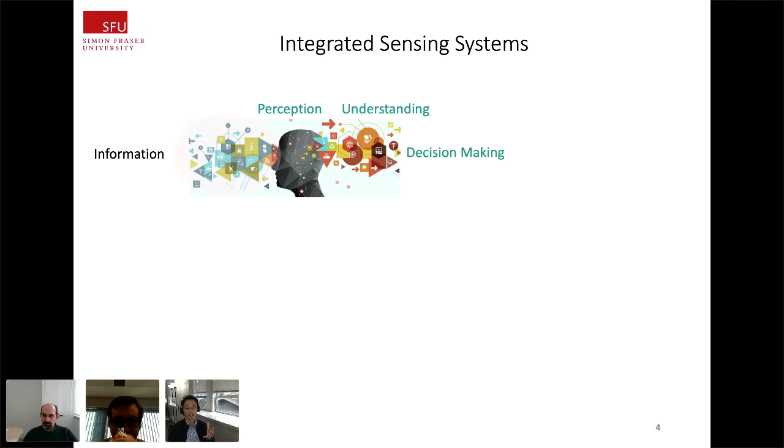When you think about the Internet of Things and the connected world concept, the important feature, the important device, is the sensor. By replacing our sensors like eye, nose, tongue, can you get those with devices? Internet of Things and wearables - sensors can perceive this information well. But as you know, sensors historically were rigid.

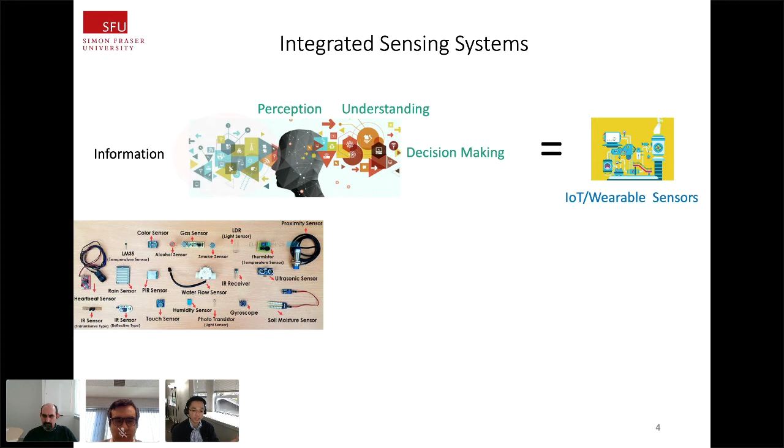All different forms of sensors have a mismatch, possibly a mechanical mismatch, between what's worn on our human body and the sensors themselves. So there's a huge need for curvilinear form factor devices, meaning flexible, stretchable, or three-dimensionally integrated - what we call structurally integrated sensors and interconnections. There were several recent demonstrations of wearable sensors: wrist type, printed directly on the skin, or structurally integrated on the tip of a robot. In order to realize these curvilinear form factor devices, we definitely need a flexible manufacturing methodology - that's why we focus on 3D printing, as we need fabrication methodology for 3D unique form factors.

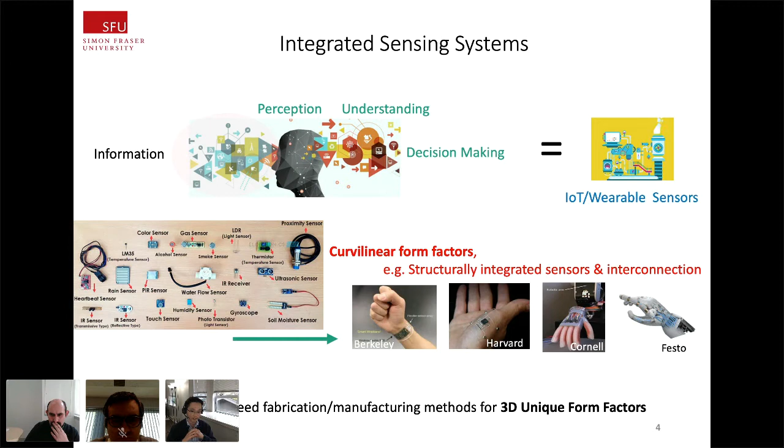We're developing 3D printable novel materials, especially conductive materials. Without printed conductive materials, we cannot realize any sensors or any electronics, right? So that's one of the important parts.

And then we are interested in developing new technologies in terms of 3D printing process, something like a core-shell nozzle-based 3D printing or six-axis robot-based 3D printing, stuff like that. Also important is topology optimization and thermal or electrical simulation for your 3D printed objects. So these are kind of fundamental.

When I started my lab, we were very interested in making physical sensors, chemical sensors, stuff like that. But recently we realized that one important feature of this field is getting those individual devices, individual components connected. So I'm more interested in interconnections than sensors themselves nowadays.

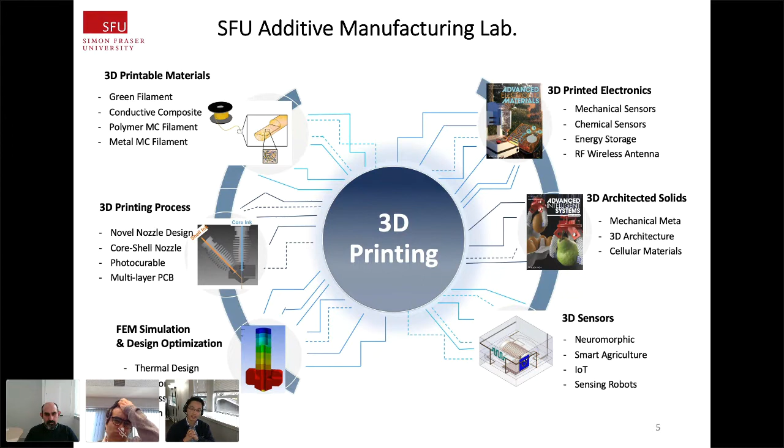All right, so moving on, let's think about 3D printable structural electronics. So I discussed that 3D electronics, which is structurally embedded. There's been a lot of research done about this field in terms of device fabrication, like miniaturized capacitor, inductor, stuff like that.

And then by having the architected solid, energy storage device research has splendidly increased nowadays, and also wireless transmitting devices in terms of data communication, 3D printed, and all those sensors and robotic applications with the sensors too.

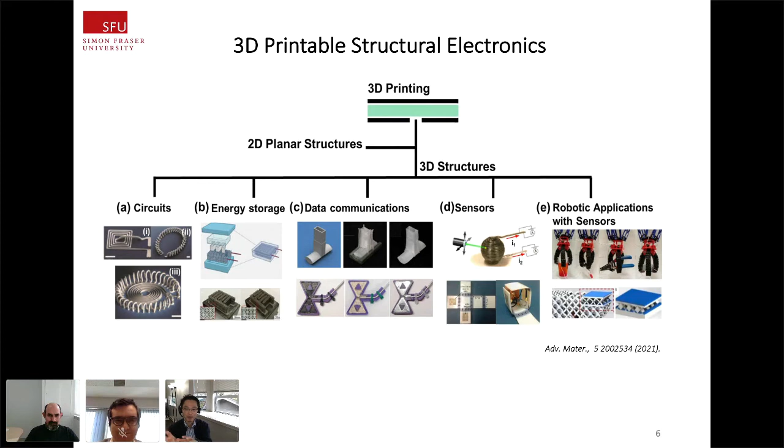So my talk today is specifically focused on biomedical wearables and sensing robot applications developed in my lab. I'm not going to go over all those. So maybe the talk is more on the biomedical sectors today.

Okay, so before introducing our outcomes in terms of wearables, I want to talk about the number one important thing in my lab, which is actually the interface with biomedical wearables or sensing robots. That's the conductor, right? So 3D printed conductor. Without careful consideration of this conductor, it's not going to be useful for wearables.

Because it's going to contact directly with our skin, or it's going to be fabricated on the robot hand, and then it's going to contact with the human body. So without careful consideration of the conductor, we cannot realize a reliable as well as safe device. So we have been working with main conductors like metal nanostructures, such as silver nanoparticles, silver nanowires, and also graphene.

The reason we chose those is because there are a bunch of different conductors in the market, but the important thing is conductivity. If it is not reaching over 10 to the 4 Siemens per centimeter - Siemens per centimeter, not Siemens per meter - if it's not reliable above this level of conductivity, it's not going to be useful. I mean, we can get a resistive sensor with, let's say, 10 Siemens per centimeter level carbon nanotube or something too, right?

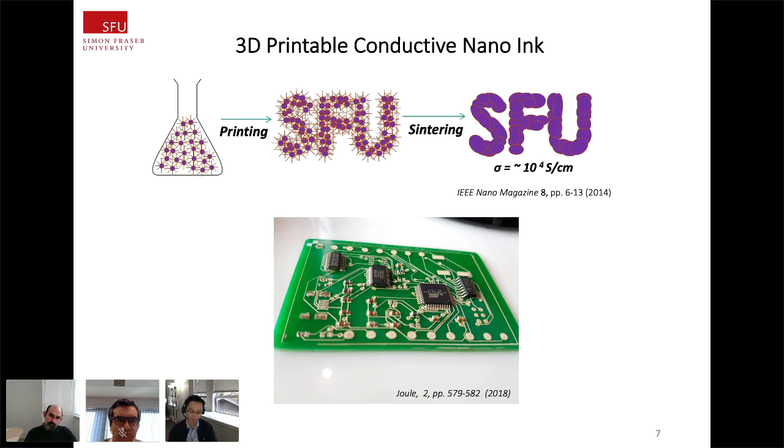When the top electrode can vibrate very sensitively, it can catch any type of acceleration. We can design that top electrode as a membrane type or serpentine type, then we can make a very sensitive accelerometer that can detect any kind of motion. Even when attached to our body, it can detect heartbeats. If you see this graph, we attached this accelerometer on our neck, on the pulsing zone, or inside the elbow, also a pulsing zone, and we get very reliable heartbeat sensing, similar to PPG. I think you're familiar with the oximeter-based PPG—this is identical signal of heartbeats.

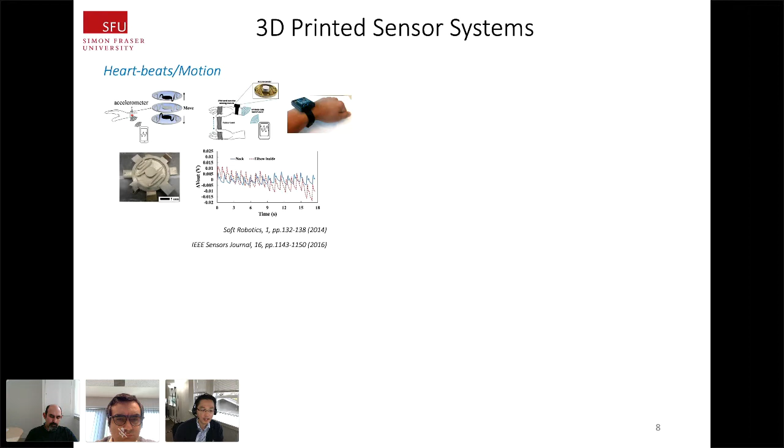We are also interested in blood pressure measurement. There's some methodology to estimate blood pressure by having ECG and heartbeats together. I didn't post the processing here, but we have an accelerometer on our pulsing zone on the wrist, and an ECG sensor attached close to our heart—so we have paired sensors together.

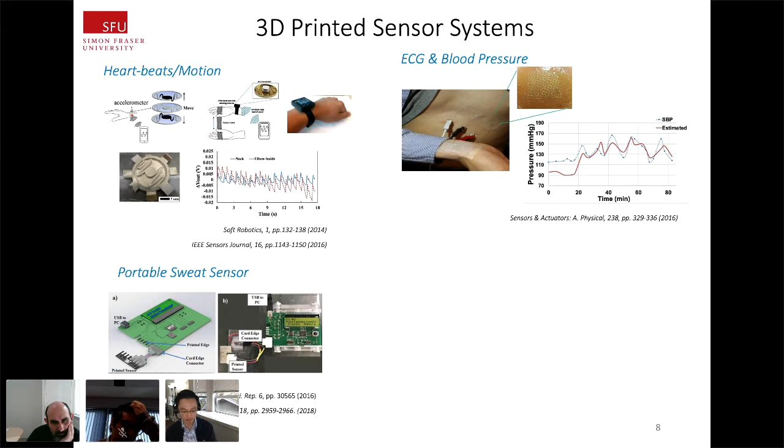So this is kind of a sensing platform. We developed the portable digital microfluidic, which can vertically move, and then we can get droplet sensing and droplet mixing, stuff like that.

So like you can see in this vertical tower, the droplet is moving from the bottom to the top. This is electrically moving the droplet against gravity. So by having this platform, we can select some heavy ions and lighter ions, and we can detect the targeted ion. So we utilize this digital microfluidic sensor.

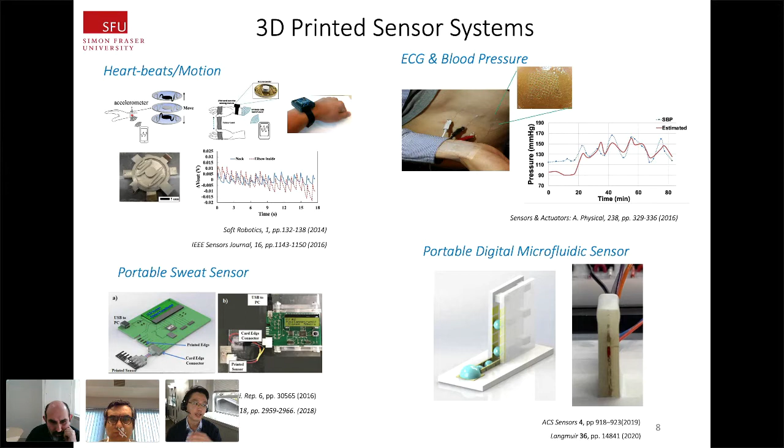So these are the 3D printed wearables and the portable sensor system we developed so far. Especially about ion selective chemical sensing and neuromorphic, we're interested in sensing our saliva. So we want to make kind of an artificial saliva sensor like our tongue. That was our objective.

So we made a different platform of study. This is a kind of well-known field we call the ion selective membrane-based thin film transistor system. As you can see, yellow is the electrode, so source, drain, and gate, and we extend the gate.

And that gate is modified with an ion selective membrane, and when the ions are selectively transmitted, the gate electrode resistance can be changed. By having this mechanism, we can get the transistor signal. So when this ion selective membrane is targeted with ammonium ion, then we can get a very linear relation.

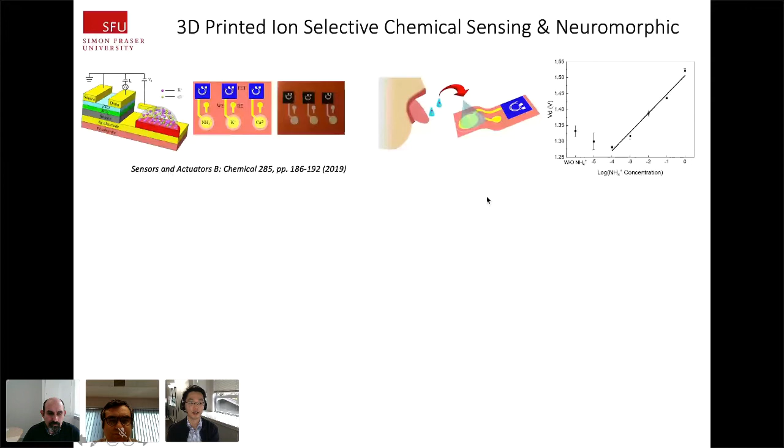So back then, we were interested more in the sensor itself. But again, as I mentioned, we are interested in making a sensory system. That's why one of my PhD students is focusing on neuromorphic.

As you can see, neuromorphic is a kind of sensing system like in our body. We want to see not just the sensing, but the processing of that signal. So we're kind of mimicking our neuron.

So the stimuli comes into the sensor. This is the same thing like this ion selective membrane. And then that signal can be activated by an electrical oscillator. So we designed the 3D printed electrical oscillator, which contains all the components inside, like resistor, capacitor and inductor, and then a resistor outside. So we designed the oscillator.

Then the oscillator can give an AC signal to the synaptic transistor. Then we can get potentiation-like behavior. And then eventually this synaptic transistor has a mechanism to have a memory effect.

With a smaller quantity of ions, we can detect some signals by training. That's the beauty of a neuromorphic system. So we developed this system to realize, from sensor activation, eventually a memory effect too, as a neuromorphic system. So this kind of approach is moving forward for chemical sensing.

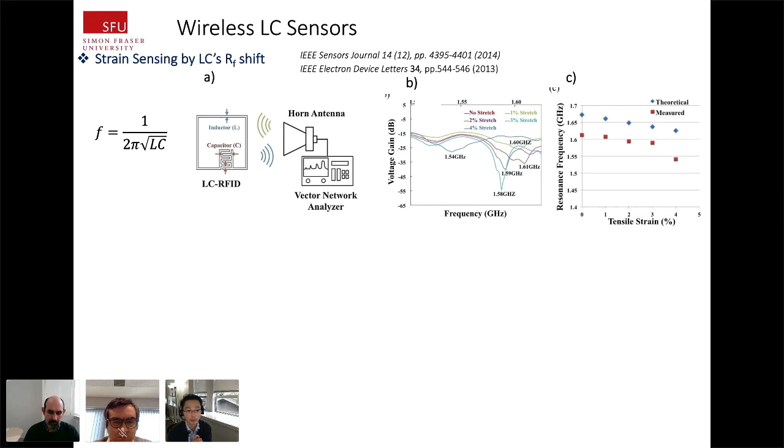So by having tensile strain, we can detect the resonant frequency change like that. That was the mechanism we developed. So LC's resonant frequency itself can be shifted. Then by reversing it, we can get how much strain is applied to the human body. So that was the strain sensing mechanism.

And another mechanism we developed involves these resonant frequency peaks' quality factor change.

These resonant frequency and quality factor can significantly rely on the resistance of the circuit. For example, we have a loop of this LC connected with an ion selective membrane. If we have a targeted ion passing through this ion selective membrane, then the resistance of the whole loop of this circuit can be reduced. When we have a reduced resistance, we can get the quality factor, or the peak, increased. So by detecting specific ions in your saliva, the resonant frequency quality factor can be increased.

That was the methodology we developed. So these two mechanisms are the main things: one is resonant frequency shift, the other is quality factor change. We were using these a lot for sensing applications.

That was published last year with wireless chemical sensing. That was kind of the first to try this without any expensive silicon chips or something like that.

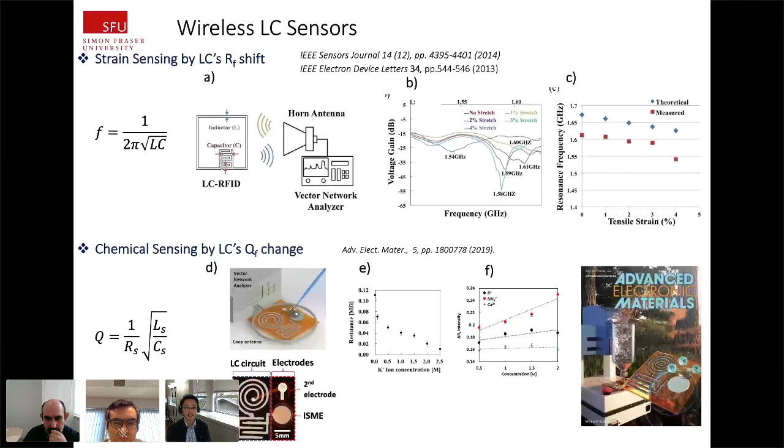So let's change our gear toward sensing robots. I like these schematics a lot—interaction between robot and human. As you can guess, our era will be moving on to AI or robots, those kinds of things. Some part of our population, like seniors or some children, it's not easy to educate them to wear wearables.

That was the initial motivation for me to move my research from wearables to sensing robots. So instead of having wearables on our body, why not have periodic interaction with a robot and the human, and give our biomedical signals to the robot?

I cannot say this sensing robot can replace the technology of wearables, because there are sectors of wearables which allow continuous or ambulatory monitoring. In that sense, a robot cannot be in touch with you for a long time. So it's not going to be replacing, but it's a somewhat complementary approach of sensing robot for some part of the wearables. That's the niche field we want to focus on.

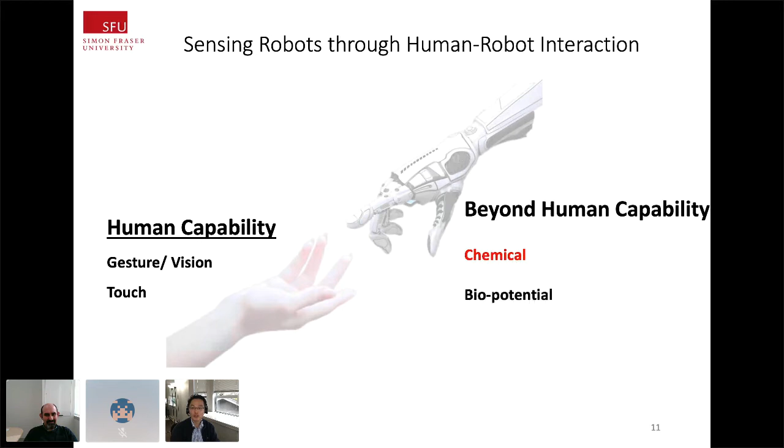When you think about human hands' capability, we can do gestures, vision, or touch, but chemical sensing is not available with your hands—you need to use your nose or tongue. But with a robot, if you have chemical sensors on the tip of the robot hands, you can do chemical sensing.

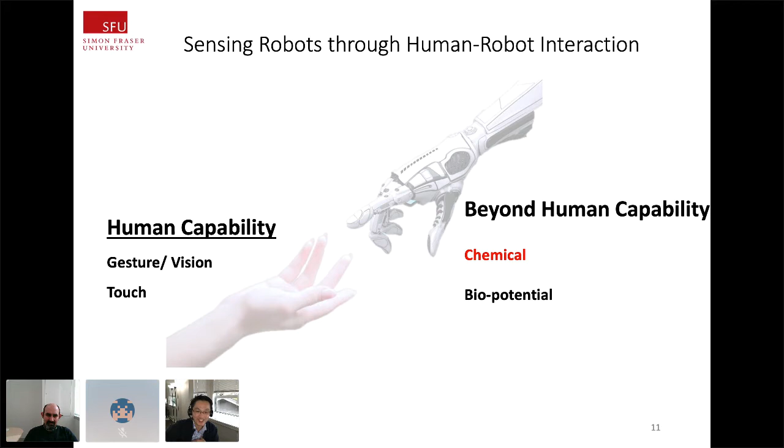You can also have biopotential sensing, something like ECG, EEG, or EMG. You cannot measure the electrical signal of your heart with your hands, but the robot can do that. That's our concept of the sensing robot.

This is a fresh paper we published recently regarding this sensing robot—a 3D printed sensing robot. Why do we need 3D printing? Because you cannot replace your robot every month or on a weekly basis. Once you have your robot, it can go with you for a long time, like a few years. But robot hands can be replaced whenever they're contaminated or whenever the function isn't working properly. 3D printing is the key technology we can apply because customization of functions and devices is a good fit with 3D design and 3D printing.

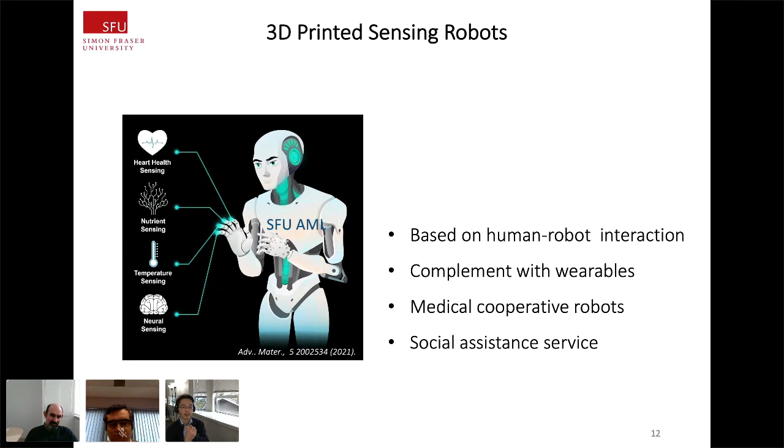This concept is based on human-robot interaction. Once again, it's a complementary technology with wearables, and medical cooperative robots can be available, and social assistance service is possible with the robot. Robot is not just hardware—by having AI or machine learning inside, it can have very smart and intelligent features instead of just sensory things. So there are a lot of features there; combining AI and this sensing capability, we can do a lot of interesting things.

Moving on to sensor capability in the sensing robot, we're very much interested in the robot body itself first. We've done a lot of 3D architected solid research in my lab. Starting from around 2016-17, we initially started with the rigid format of periodic structure—a well-known rigid structure which can be the main body of the sensing robot. This is a rigid octet structure.

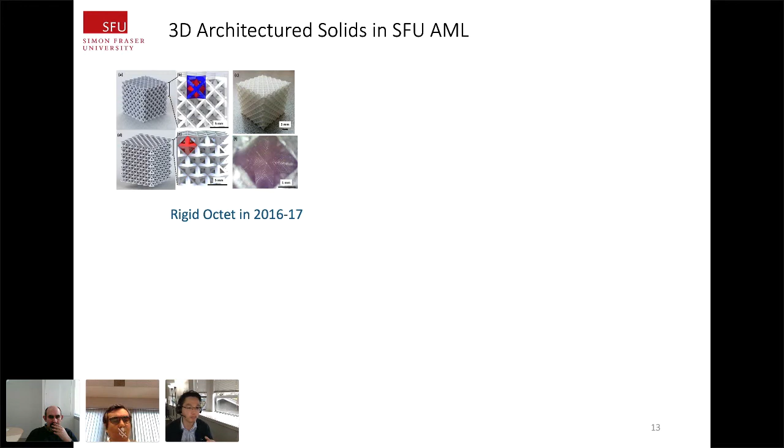We are interested in 3D printing of different materials for realizing mechanical tunability. Rigid octet and double gyroid structures were studied too, because these are very good for increasing surface area for energy systems for robots, etc.

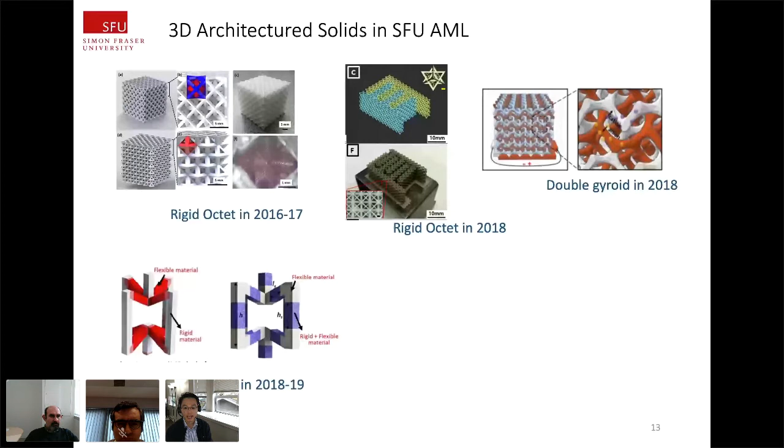We are also interested in mechanical metamaterials, which show different mechanical properties than conventional mechanical structures, like auxetics, which shows a negative Poisson ratio. I won't go into details here, but if you're interested, follow our papers on my website. Recently we've been interested in mechanical metamaterials like origami, which has some durability when bent or compressed.

An interesting thing about origami is that if we embed capacitors inside, when it is squeezed and compressed, this capacitor gap can be shortened or reduced, so capacitance detection becomes easy. This kind of origami sensor was used.

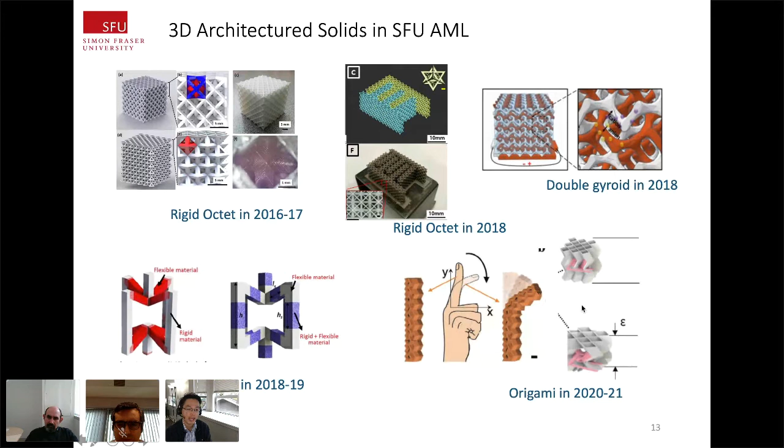Nowadays we are interested in sensing features with this kind of origami structure, and more on the robot body with these rigid structures. So the first robot we want to demonstrate is what we call the cooperative sensing robot with a touch sensing feature.

As discussed previously, the robot body is composed of a periodic octet structure, and we embed a capacitive sensor at the tip of the robot finger, designing dielectrics inside these gaps to increase sensitivity. The joint is also important — it can be bent like that, so we need a durable feature inside this joint using the auxetic structure we embedded there. That can be applied to a robotic gripper like this.

The sensing feature works like this: this white block is a kind of insulator. When the insulator is touched, we've programmed it so the finger doesn't move. But when touched with a conductor like a human body, the capacitance change is higher, so the robot finger moves or bends. So we have a smart feature here.

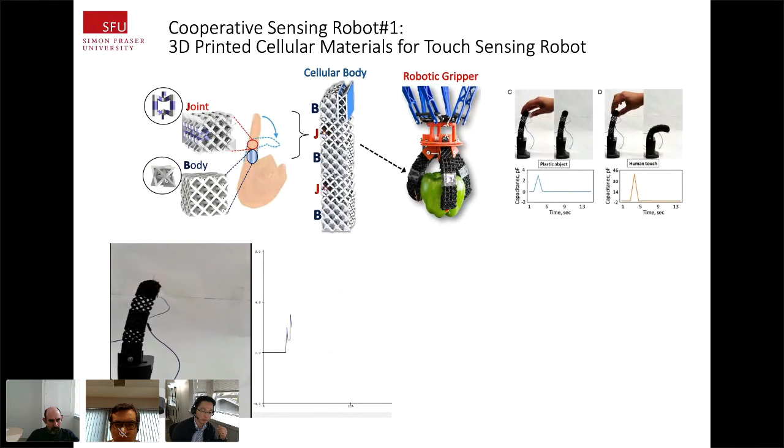You can see here: touch with the insulator, capacitance change is small, so the finger doesn't move or bend. But when touched by a human, capacitance change is high, so it bends like that. This capacitive pressure sensor can also detect whether the object is big or small, so we can apply different programmed forces to grab something — like this, gripping like that.

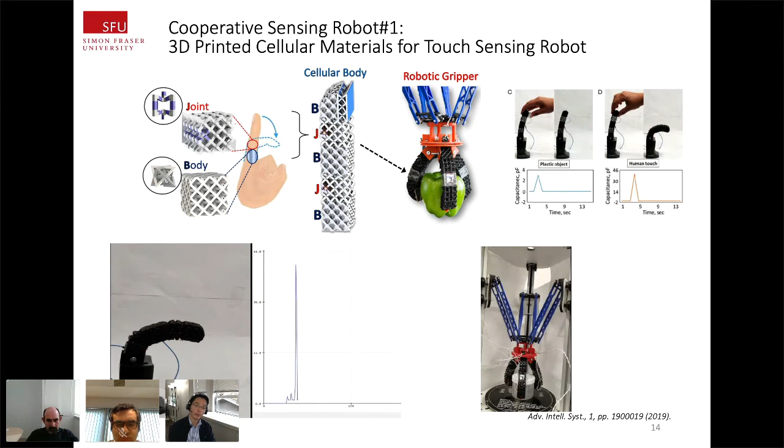So that was our first robot, which is a pressure-detectable, touch-detectable sensing robot.

The second sensing robot we're interested in is about chemical sensing, as I mentioned. When we designed the fingertip, the left side shows the finger design and the right side is the actual sample. The top front of the finger is an ion-selective membrane based chemical sensor, and the back side, like our nail side, has an LC circuit which can deliver signal wirelessly.

We have an interconnection from the front to the back side through conductive 3D printing inside. So this is a quite well-organized device.

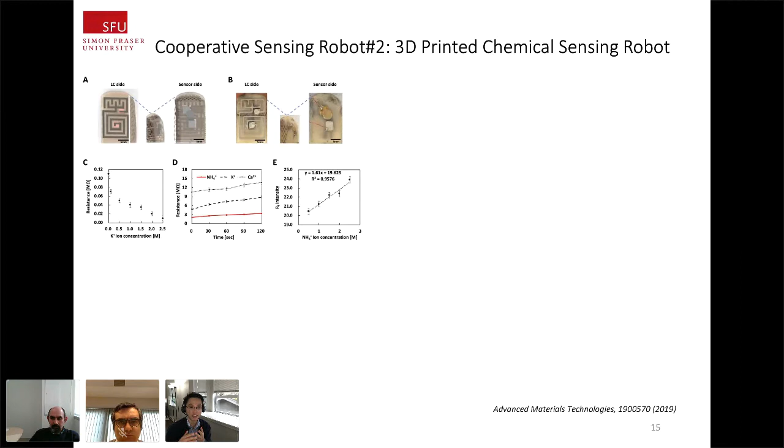When ions are detected on the ion-selective membrane, the resistance of this closed loop circuit changes. This resistance change gives you the idea of how to program the motion of the finger.

We designed this kind of robot hand, so when the resistance changes in a wired situation, it can move the finger. Visually, people can see how much concentration of ions are present.

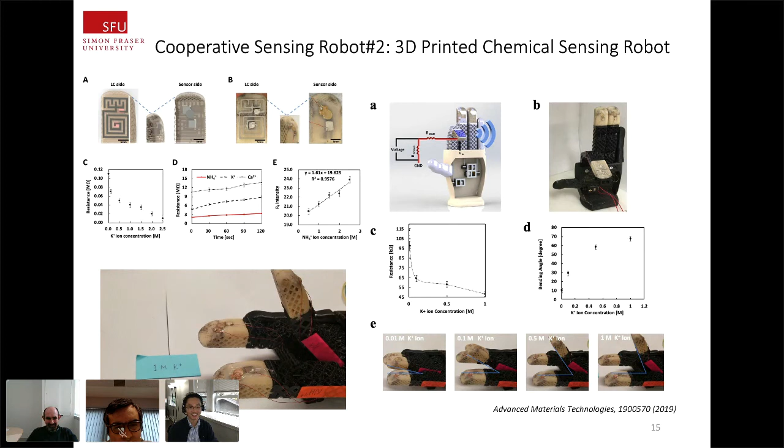For example, at 0.01 mole, potassium ion movement is a bit small, but by increasing that concentration, the finger motion becomes significant. Seniors or someone who cannot move can visually see the robot's finger motion to gauge the concentration — this video shows 0.01 mole, a very small movement, but by increasing the concentration it moves more. At 0.5 mole it moves much more, and eventually at 1 mole, it stands up like that. That gives you the idea of how chemical sensing happens.

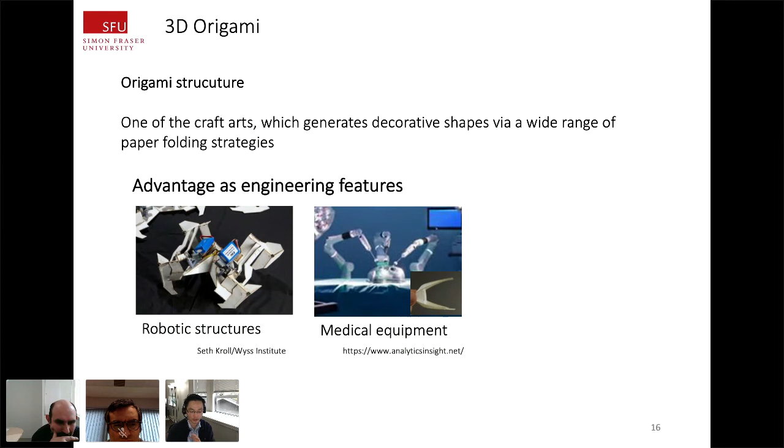Moving on to 3D origami, one of the architected solids we introduced. There are a bunch of different origami research directions, but we're interested in one specific 3D origami which shows quite compressive features. So the third cooperative sensing robot, for biomedical sensing signals, uses an origami we call the Miura-Ori module.

The Miura-Ori module is well known, but we tuned the design to make it durable, so your finger doesn't need to bend to the other side.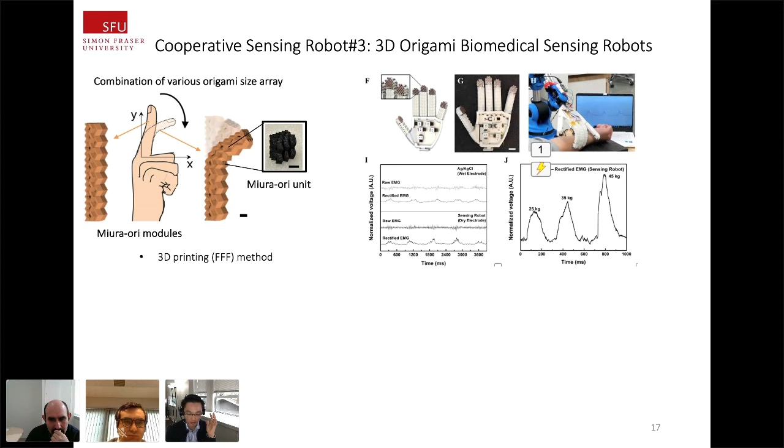We have this hand design, and at the tip of this robot hand we have electrodes. Those electrodes, mainly 3 electrodes, are needed for EMG or ECG measurement. So this is the demonstration of that hand, and the electrical signal of our muscles can be detected with these robot hands, something like that.

So now this is a preliminary demonstration with a 6-axis robot and our sensing robot hand, but it can be implemented into a humanoid robot eventually to measure this kind of electrical signal.

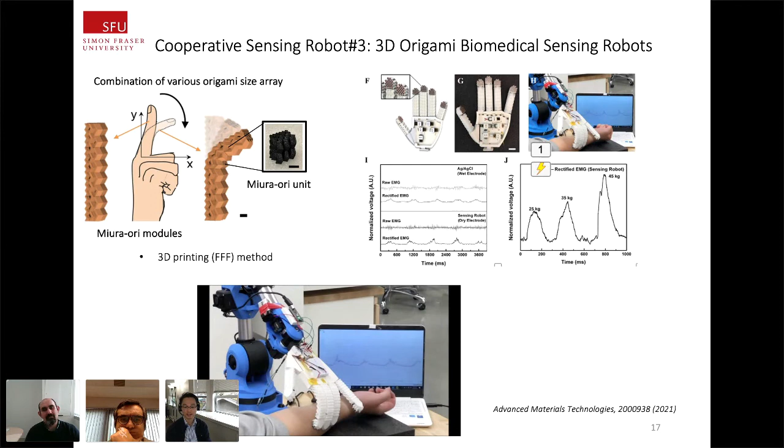And this origami is very interesting in terms of sensing once again. It has some durability, and the electrical capacitance measurement is quite sensitive by having pressure on top, like a smart insole. This capacitor gap can be reduced significantly, and then we can get a capacitance signal on the whole, the entire foot.

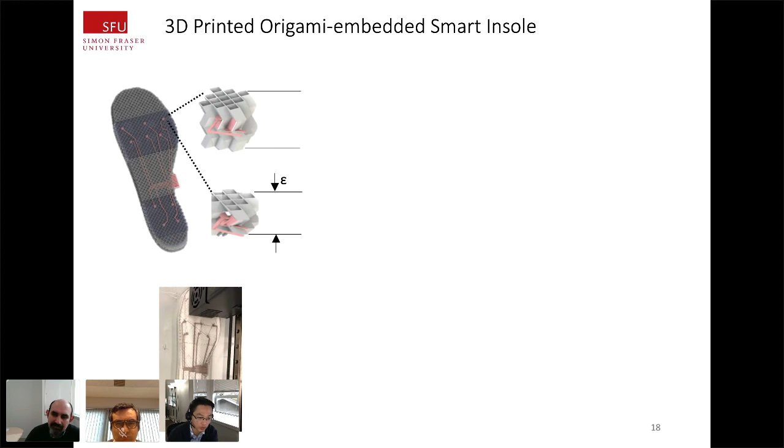Eventually this is a 3D printing process. The electrode is embedded inside the insole and made like that. The capacitance change is quite linear, so we can get a reliable capacitance signal, and then get the mapping of it.

So when there's some issue with our foot, like plantar fasciitis, the pressure is usually applied on the back side of the foot. But when the posture is corrected and the plantar fasciitis is changed, we have more reliable pressure application through the foot, like this.

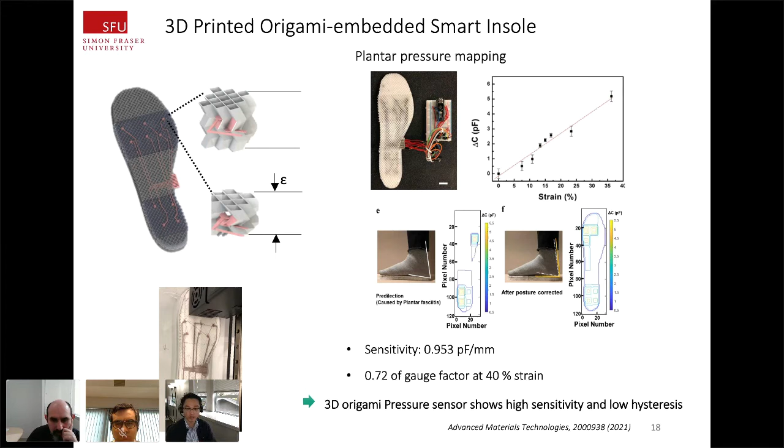So we can detect whether the patient or participant has plantar fasciitis or not by having this kind of mapping. This is done by a 3D printed origami inside, so origami itself is the structural unit inside the smart insole as well as the sensing component. That's the beauty of the 3D printed sensors inside this.

During COVID last year, you probably heard about engineers contributing by joining forces with medical doctors, etc. I did my best during the lockdown of my lab too.

So we thought about the significance of the COVID-19 pandemic situation. As you know, there were a lot of patients initially, not now. We realize nowadays not many patients need an actual ventilator, but back then, around May 2020 or summer last year, we thought a lot about generating cost-efficient ventilators. So our thought was like this.

One important cheap version of a mechanical ventilator is this AmbuBag, an automated AmbuBag. But when you think about it, the AmbuBag can be replaced a lot because of continuous stress and strain generation. Can we generate this kind of strain periodically instead of having a shock like that? That's our own idea, so by replacing this conventional AmbuBag, we want to make an origami bag.

So this is the eventual prototype we generated. Basically this origami doesn't need to be big like this because the volume can be hugely changed. Compression and release, 85% is changed, and the strain generation is periodic like that, essentially because it's based on individual joints.

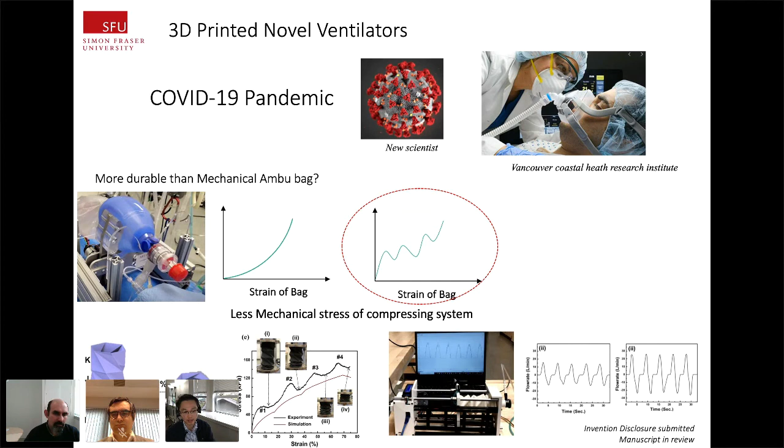Compared with this AmbuBag, it's going to be much more mechanically durable, and we can tune the air volume depending on customization possible for patients. So reliable air delivery of about 300 milliliters or about 600 milliliters is possible. And this is the video for you to understand about this origami bag based mechanical ventilator we developed.

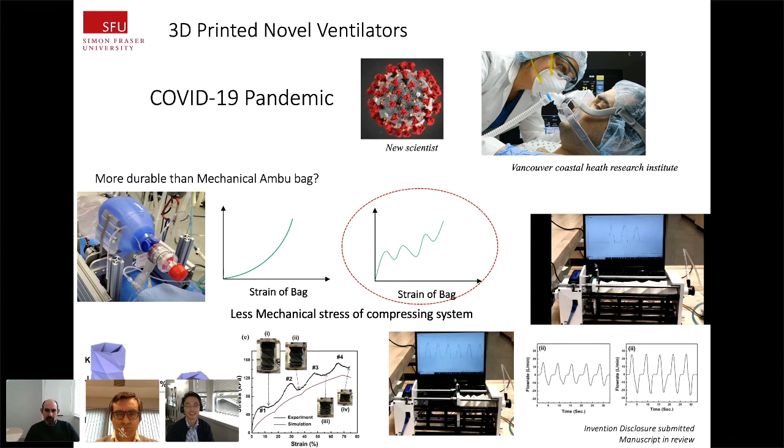So hopefully you understand about every concept I deliver about the sensing robot. So I'm looking at the future. We're focusing our lab much more nowadays on making 3D printed sensing robot features.

Someday, AI-equipped sensing robots may be possible to prescribe medications for you instead of a doctor. Whenever you visit your family doctor with a cold and general symptoms, do we need to meet a medical doctor? That's the concept, right? Maybe in future we'll have some walk-in clinics equipped only with AI-based sensing robots, and these sensing robots detect your temperature, your coughing, or any electrical signal like heartbeats, etc. Based on a huge database, the AI robot can give you the prescription. Why not? So that's the future I'm looking at.

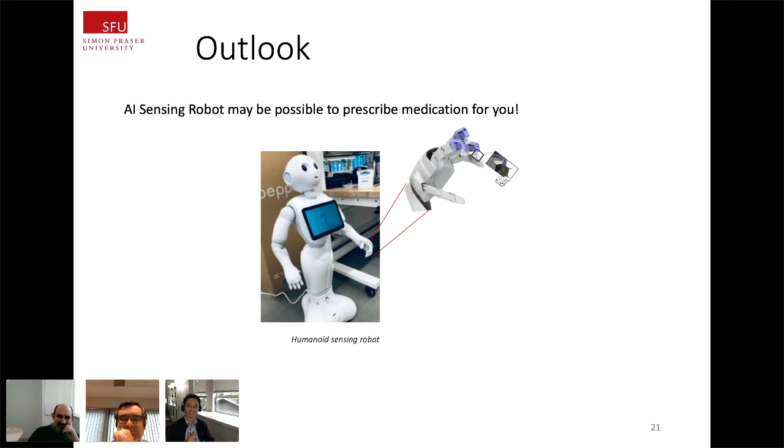So any questions? I will take your question from now.

Thank you so much, Professor Kim, for your great talk. It's a bit so, the question probably is, can robots distinguish human beings in the future? I mean, they can replace us, and then it's a bit scary.